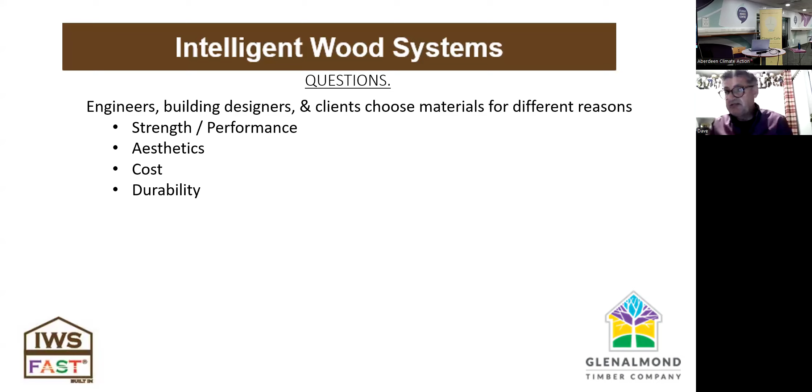With timber construction, Carol has pretty much touched on most of it anyway. There's always questions. Engineers, clients, building designers, they choose their building materials for various reasons. It could be the strength, the performance, the aesthetics. Cost comes into it, durability, usability on site. How easy is it to access and erect? Planning stipulations, some restrictions. There's personal preference. And there's claims by sales literature and people like me.

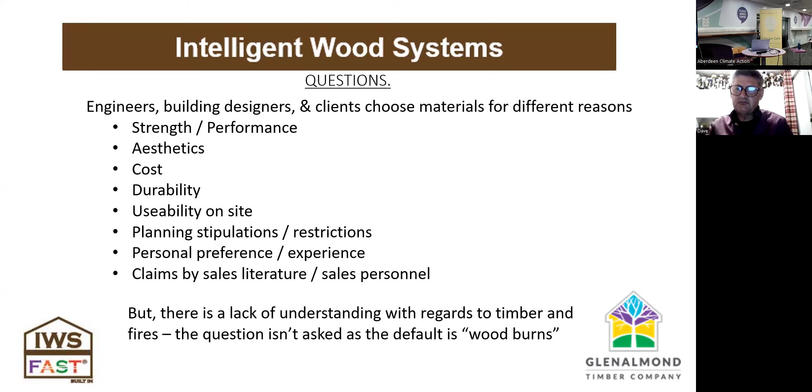All these things are covered when you're making that decision process, but there's still that grey area of fire. When we talk to people, people say, oh, wood burns, and that's it. They shut you off straight away. Tonight's agenda is about can we replace more traditional products with plant-based products? And I believe we can.

So does timber burn? Yes, it does. Anything with wood fibre in it has potential to burn. We're not going to deny that, but can we manage it? Quite often customers will ask, should I use alternatives? We don't really want them to, but the options are concrete.

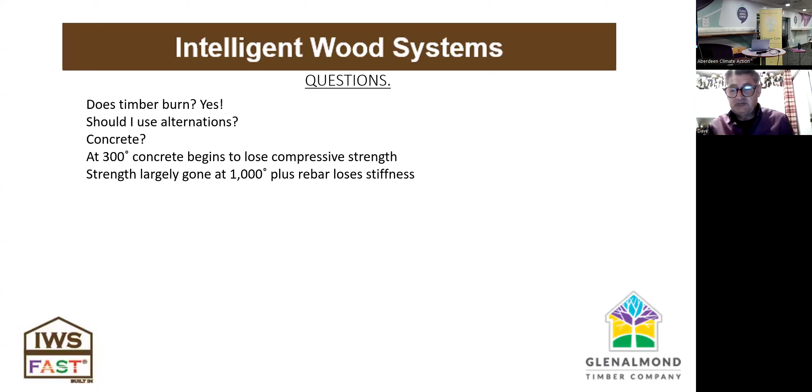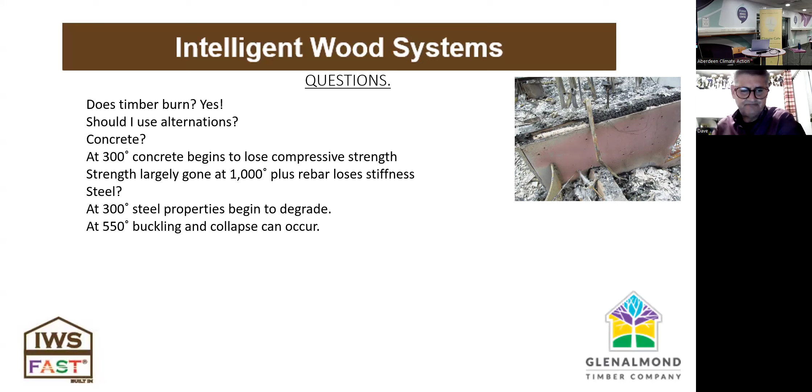Metal, when it gets hot, it can drip. That melted steel can create secondary fires. People use light gauge steel inside instead of timber stud walls, but at 900 degrees, light gauge steel loses 87% of its structural performance. So it's maybe not always the best thing to move away from timber just because of fire.

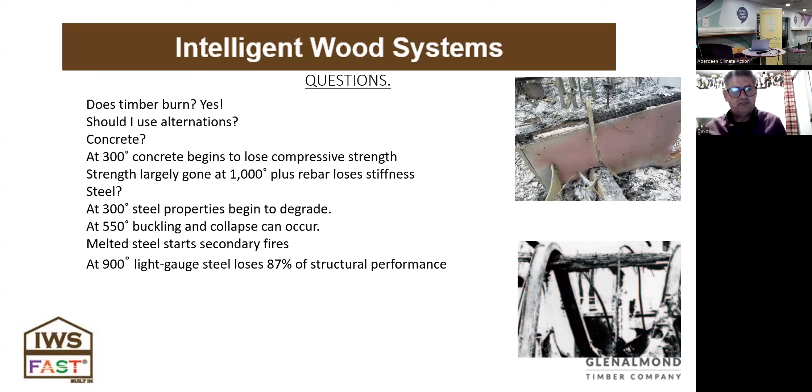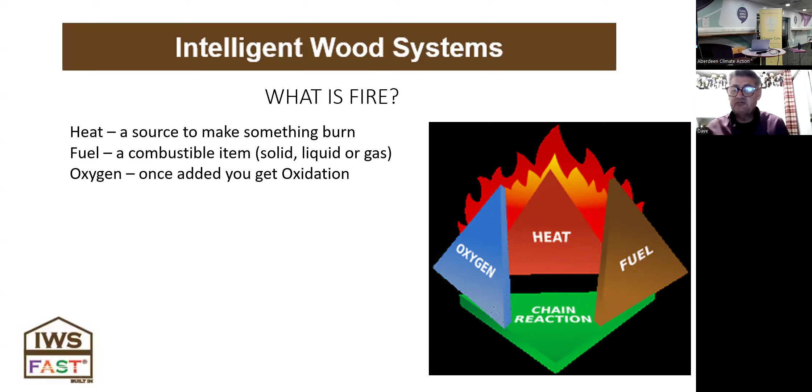Basics, what is fire? It's three things put together so you get a chain reaction. You need heat, something to set fire to it. It could be malicious, it could be a genuine mistake with hot works on a site. You need a fuel, could be a combustible item, a solid, a liquid, or a gas. Everybody always just says it's timber. Oxygen—when we've got these construction sites, they're all outside. So when we get this combination of three things, we get oxidation, which you and I call fire.

When we see fire tested and trying to prove fire, there's lots of terminology. When we see flame on a piece of wood, that's just the internal gases igniting. That's what you see as that lovely orange flame. The mass timber guys will talk about char. If you've got a thick piece of timber and it's burning and it takes the moisture out, it forms a crust. That crust is nature's way of sealing in the gases, so the gases can't come out, they can't ignite. So they talk about char rates.

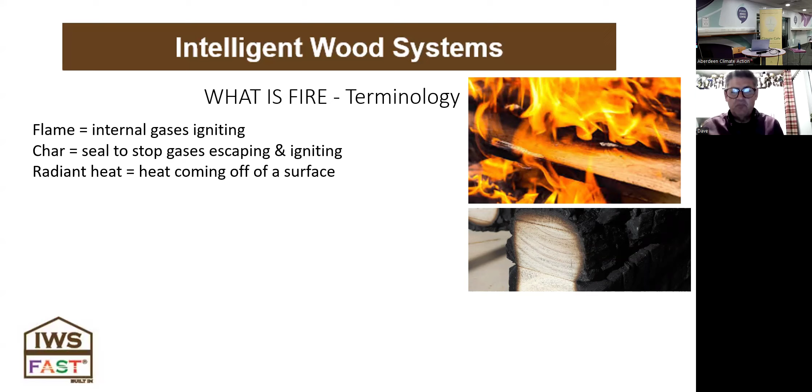Radiant heat's a big thing. When wood burns, it chucks off a lot of heat. So when we talk about that, it's just that heat coming off the surface. Flame spread—when you see a fire break through and it travels in all directions, that's just the flame spread. And flashover—flashover is a big thing. If something's burning within a room, the gases it gives off will collect in the top of that room, and when the heat gets to a level, it will self-combust and you'll get a big sheet of flame. That's known as flashover. If you watch the movie Backdraft, that's all about flashover.

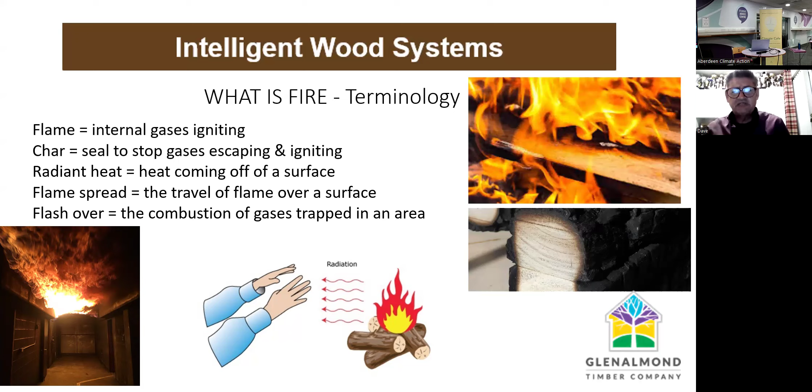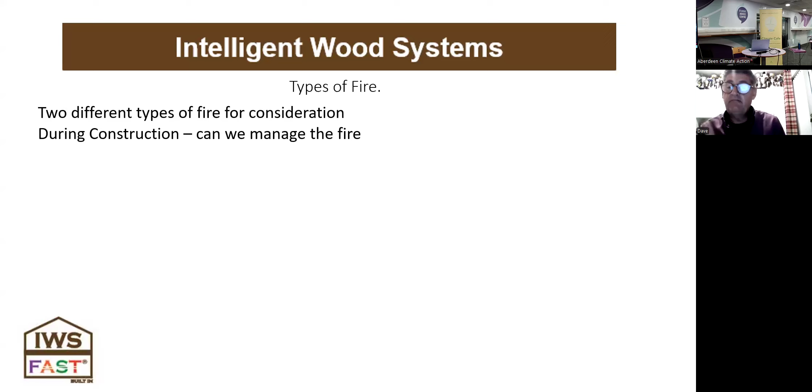Now, these things are all relevant in the way we specify timber. We essentially have two types of fire. We have during construction, and the challenge then is, can we manage that fire? That's a building site—as you can see, lots of raw material, lots of air. If that catches fire, can we manage it?

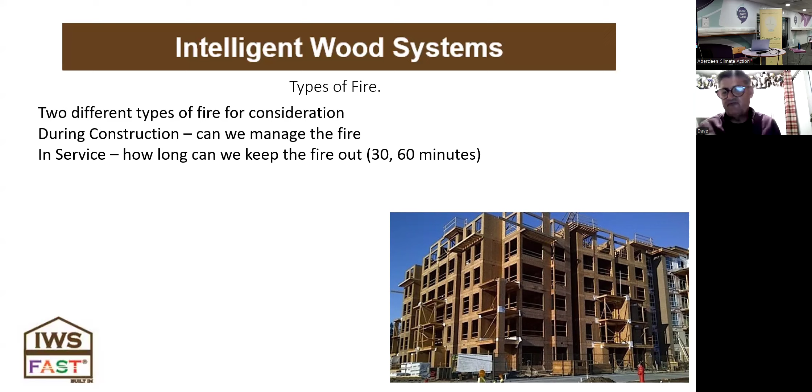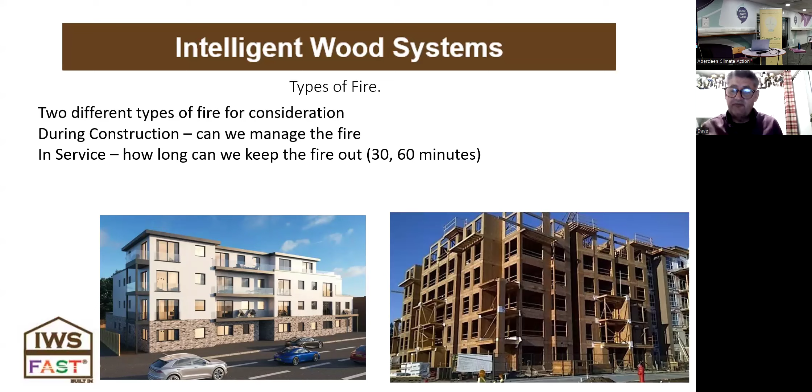Or in service, when we get lots of architects and engineers talking about fire performance—30 or 60 minutes—that's considering the finished building, when everything's in place, your plasterboard's in, your doors and your windows. Essentially that's saying, how long can I sit inside this room before the fire gets to me? Is it 30 minutes? Is it 60 minutes? And that will consider the sum of the parts within that structure, not just one element, all of the elements.

So when we talk about during construction, it's when it's at a skeletal stage. The STA, the Structural Timber Association in the UK, can be considered world leaders in this. Light frame or timber frame, as we call it—so you've got small timber members clad with sheathing, which could be plasterboard, plywood, or OSB. It's very, very combustible. So they build this pod.

It's designed to look like a building site. It has a window opening, has a door opening, has no insulation, no drywall, no windows, no doors. It has a dwarf wall above to represent the second story of a house, and it has a wall to the right-hand side to represent your next door neighbour.

During this constructional stage, they put an awful lot of fire in it. It's usually averaging about 985 degrees in there, and quite often it exceeds 1,000 degrees. The challenge is to keep the structural integrity within that box so everybody else can do their job.

We have to add chemicals. Timber doesn't do it on its own. There's special chemicals out there, but it doesn't damage the timber. It will make it harder to light, and it will slow down the spread of flame, and reduce the radiant heat.

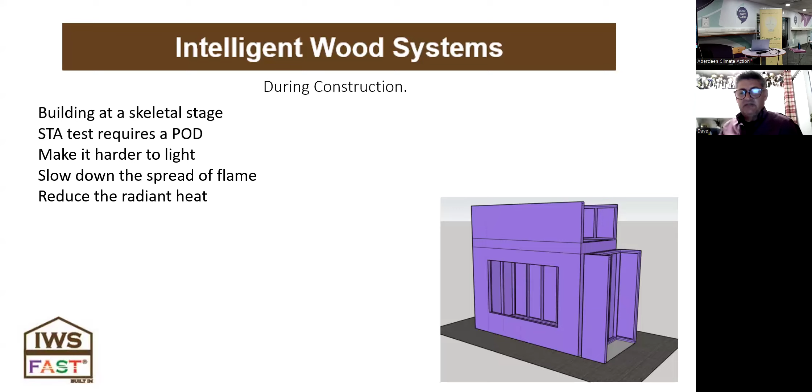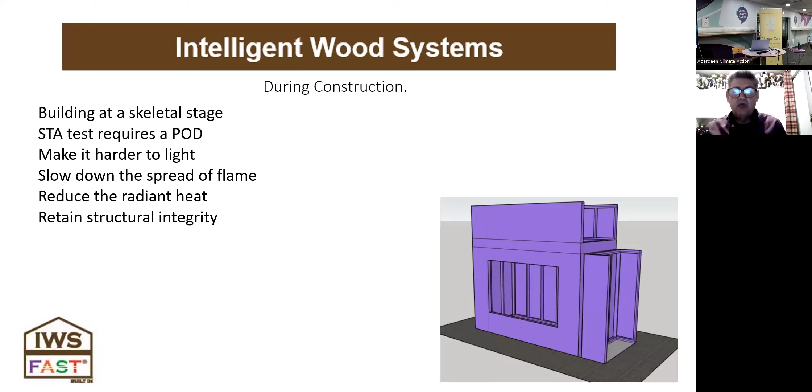These things are important. If you can increase the ignition time, so it takes longer to ignite and spreads slower, first it allows people to safely escape the building site. Second, it gives time for the fire department to arrive. And if you reduce the radiant heat, they can get a little closer to fight the fire and save your building. It's important that we retain the structural integrity.

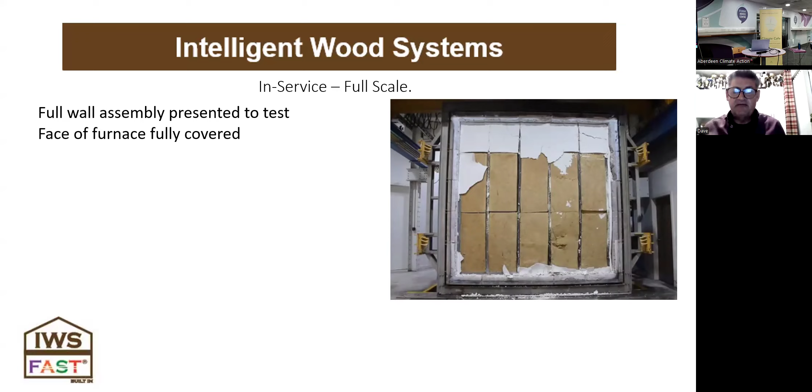So that's during construction. The second one is in-service, which considers full wall assemblies - a whole wall put across the face of a furnace. They introduce an awful lot more heat. It's basically big sheets of flame hitting the face.

The temperature is measured on the outside. What it's looking for is to keep the temperature to a minimum or to avoid any breakouts. That's an in-service fire test.

We measure this in minutes. Can you get 30 minutes? Can you get 60 minutes? That's answering the question that the architects and engineers ask.

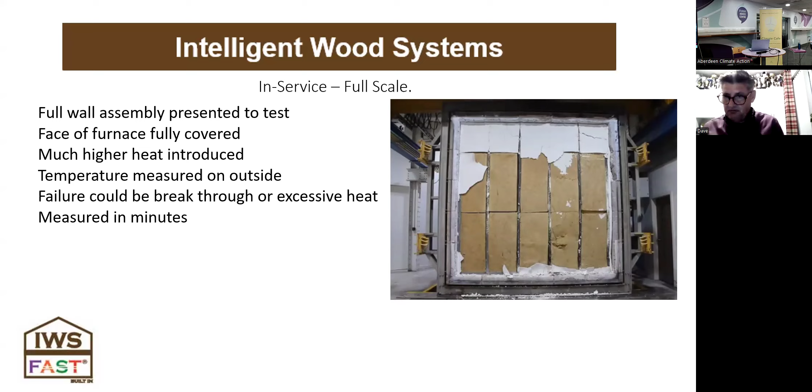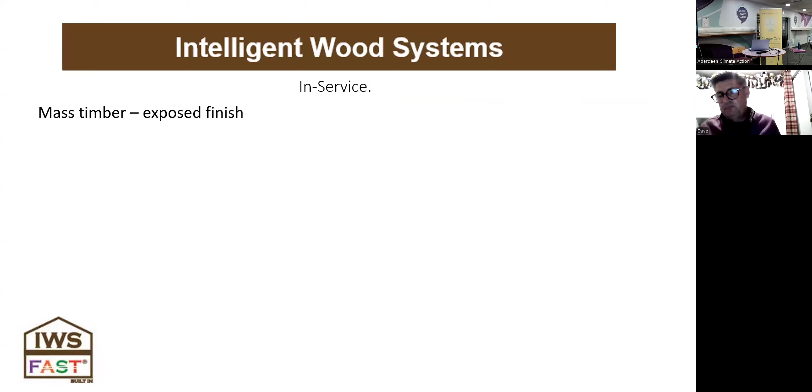If you're not doing a full in-service component test, you can do individual tests. So if we're using mass timber, with a CLT that Carol has mentioned, you can encapsulate it with drywall - you don't have a fire risk. But if you're buying this beautiful piece of timber, a lot of people want it exposed.

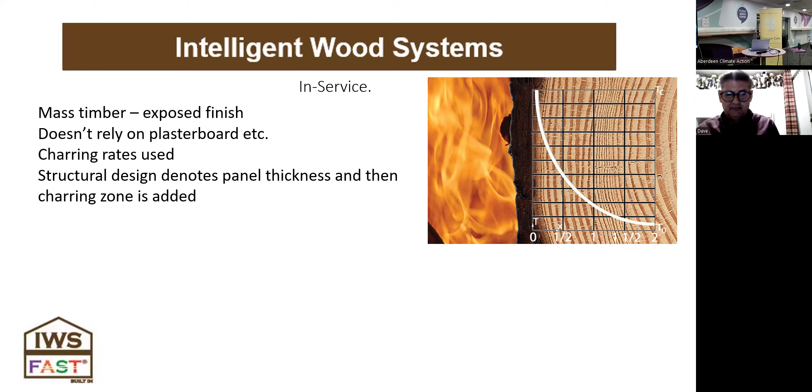So we have to use what they call charring rates. We can't rely on plasterboard because it looks ugly. The charring rates are a calculation. The structural design is done on the panel - it will tell you it's going to be 100 mil, 120, 200 mil thick. That's the structural calculation only.

Then a fire engineer will specify the char zone - that's how much sacrificial timber can be on that. So should the building catch fire, you'll keep your structural integrity and the char will help slow down the fire, and the fire department will put it out.

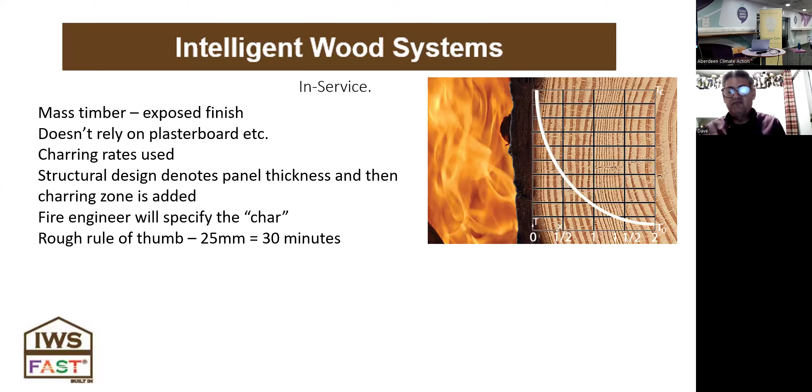A rough rule of thumb is 25 mil on every exposed face should equal 30 minutes. That's just a rough guide. Your fire engineer will give you the exact number on every design.

So if you're not doing a full wall, you can go and get individual components, normally claddings, tested. You take the individual item, form a small panel, and introduce heat to the face. The measurements and observations are always taken from one face - they don't take any measurements from the rear.

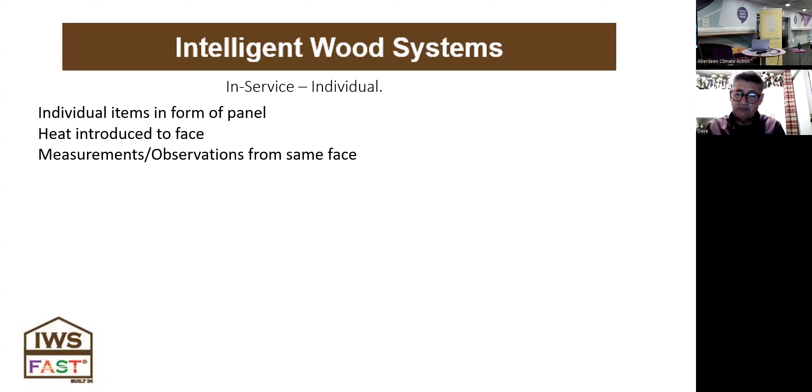This gives you an idea. Non-combustible materials are A1 and A2. Nothing with a wood fibre in it will achieve the A's, but you get to the B's. The B's are the next best thing to non-combustible.

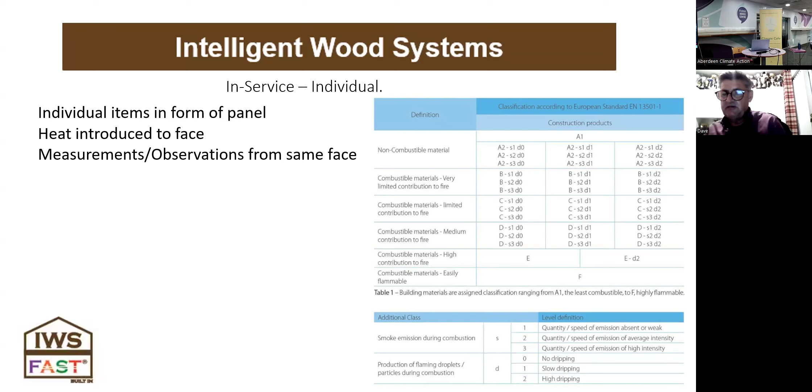So this is a Euroclass rating. When we see the ratings, they'll be in three parts. B is the category it falls into - combustible materials with very limited contribution to fire.

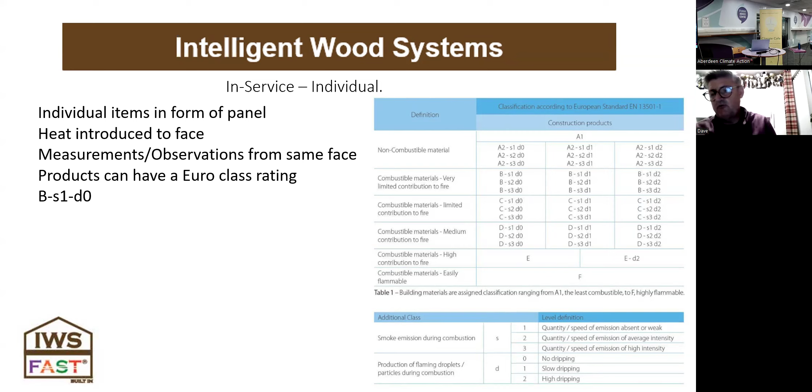The S is a rating on the smoke emission, and the D is droplets - has anything dropped off and contributed to starting or continuing the fire? In this case, 0. If you can get a B, S1, D0 on timber products, it's a very, very good product.

To give you a quick idea, I won't make you endure it all. I will jump through it.

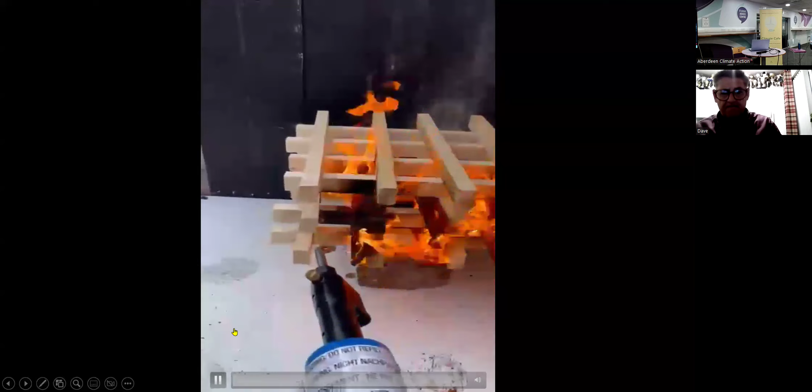So this is cladding on the outside of a building. Heat is introduced to the face. There's an awful lot of heat there, and the idea is that the timber on the face of the panel, the outside of a building, won't contribute and allow the fire to spread. You can see the lighter coloured one - we've got some fire on the surface now, but it's not travelling.

The flame's not quite as impressive now, but there's an awful lot of heat within that crib. As you can see, the localized area of the fire, but it's not burnt through and it's not spread, and there's nothing dropping off it to create other fires.

That's over 7 minutes now of an intense burn against the face. Yes, we have some superficial damage, but we're not compromising the building or the buildings in and around it. It just gives you an idea of how these tests are conducted. We can show you more at a later stage should you wish.

So I'm trying to keep it as quick as possible. Timber and timber-related products will burn, so the naysayers who say don't use timber, they have a point. But timber's no worse than the other safer options in its natural state. Plus, we get the opportunity to add chemicals and design the risks out.

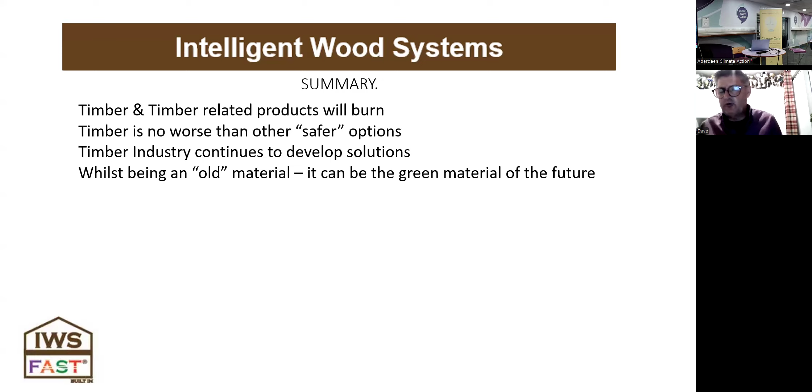That's it. Thank you for your time. Any questions?